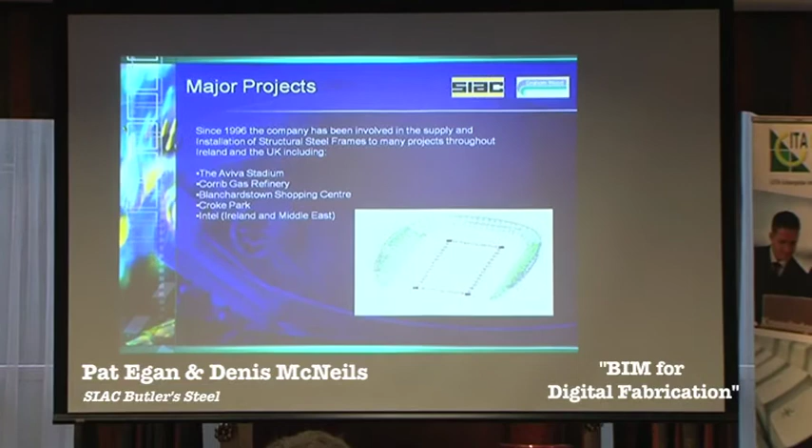So since 1996, the company has been involved in the supply and installation of structural steel frames throughout Ireland and the UK, including, as I said, the Aviva Stadium. We're working on the Corrib Gas Refinery, Blanchardstown Shopping Centre, Croke Park, Intel both in Ireland and in the Middle East, Pfizer Pharmaceuticals, Wyeth Pharmaceuticals, Microsoft Data Centre in Grange Castle, and various bridge projects, to name a few.

But all these have been done using 3D modelling systems without exception. If we were to make the smallest piece of steel that you might pick up in your hand, we'll input that into our 3D model along with the rest of the job. We don't do anything by hand, everything is linked that way. We have total traceability then.

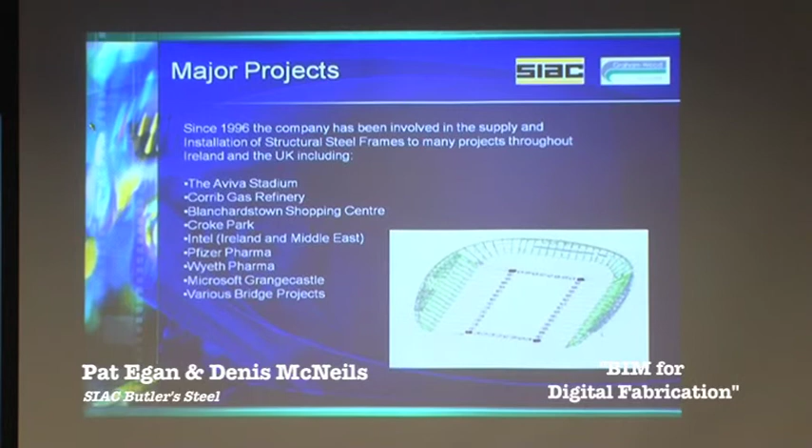Now, Dennis is going to speak about digital fabrication. In the time we have, he can explain a little bit more about the models, etc. Right, Dennis?

Yeah, thanks, Pat. I'll try and keep it relatively simple, but as Pat says, the steel industry as a whole has been effectively a BIM process for over 20 years. And the advantages to us were so apparent that very quickly the whole industry moved down the route of going to 3D software for the modelling and production of all the drawings.

And there are numbers of companies around that do the software, but in Ireland up until recently it was primarily two main companies, StruCAD and Tekla, and now they're one company. So we've got more synergy happening, more production, more effectiveness coming out of the overall design process.

If we take, come on, computer. We always have a computer glitch, don't we? No, I don't know. Yeah.

So, key to the way it works is in-house design and detailing. Because we have our 3D model, we then have full information flow feeding into production facilities and the estimating and, more importantly actually, site. Because since we create the 3D model, and it's very heavy-end software, large computers required, they all have viewers, and those viewers we can send to site.

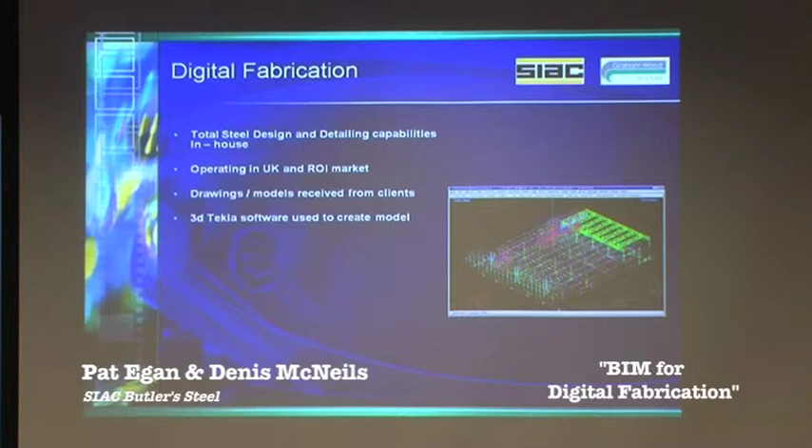So anybody, say an erector on site or the project foreman, if he isn't certain how something goes together, he can go onto the 3D model, rotate it in 3D space, find out how it goes, and check either a mark number or plate size or whatever, and feed back into there. But the key thing is everything we do, as I say, is 3D. The challenge moving forward is for us to get 3D information.

What's happening at the moment is an awful lot of engineering practices and architectural practices are now moving to the 3D world. And they're producing Revit models, or Navis models, or models in 3D. But what they then do is they convert them into 2D drawings, send them to us, where we convert them to a 3D model, and then we extract 2D drawings to send back to them to check. And each of those stages is a potential for error to creep in, or misinterpretation, or whatever.

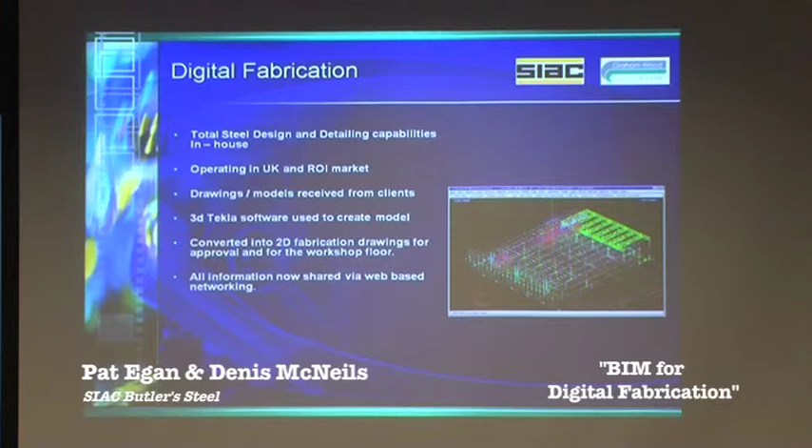And there are now IFC classes which allow a Revit model to export out a file which we can import. And if we get that, it'll get rid of some of the errors that can creep in. But there is an education process that's required, and it is happening. We just hope it'll happen quicker. We've been doing it for 20 years. Hopefully this will move in the next 3 to 5 years.

It'll be everywhere. In the UK, there's a very strong government push towards BIM, and they have a BIM strategy for 2016. From the steel industry, we're happy out, because we're BIM. We're level 2 BIM, so we don't have to worry about that. For the rest of the industry, there is a lot of fear about BIM, but there shouldn't be. It's not overly complicated. We're actually all working toward the BIM environment, but there's an education process, and I do feel it'll all fall into place.

So, our 3D BIM model feeds back into a main database, which in our case is a Strumis database, or it could be a FabTrol database. And that information then gives every plate size, every weld size, how much area of paint there is, what the weight of a piece is, so that from a site point of view they can say, well, that truss is going to weigh 45 tons, so I know what size crane I need. Very difficult to do without a proper 3D model.

And all of this feeds into our production facility. So when we produce the model, press a button, it runs off NC files, which are then fed into the equipment on the main line, which cut and mark every plate, which are all uniquely identified. And it produces fabrication drawings, which the fabricators will then use to pull everything together. And it produces dispatch lists, so that you know that you've got 22 tons on the trailer, and you know what pieces are on the trailer. So hopefully everything gets to site in one go.

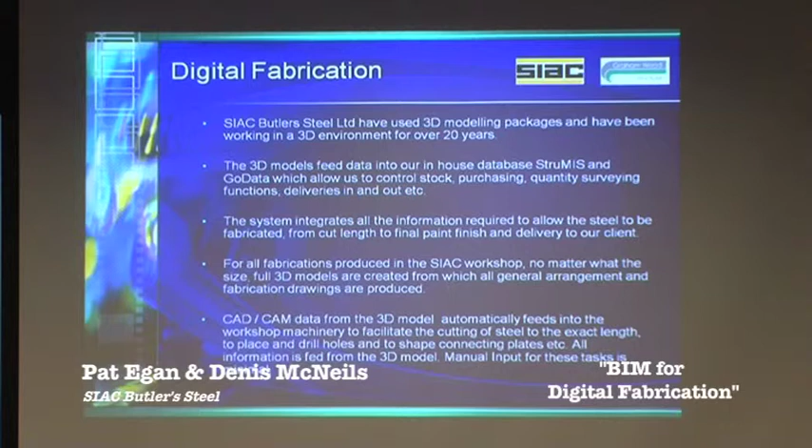And finally, the CAM data. One of the things that is happening is that now the CAM data is going to the Strumis or FabTrol product, and it's feeding directly to the production lines. So you can actually say, I've got 45 of these end plates to make, but I only need 3 in this load of steel. And it'll send those 3 plates to the production line. It'll make 3 plates, and it'll actually tell the computer back saying, yes, I've now made 3 plates, and they've taken us 10 minutes a plate. That's the next stage as they're moving along.

And we have every single bolt, weld, fillet, everything you can think of is in the model. So when you actually think of it, we're building a 3D real model. And it's not like you're just saying, well, it's close enough. Everything is to the millimeter, because everything that goes into the model comes out and is made and is erected. We get it wrong in the model, it doesn't fit.

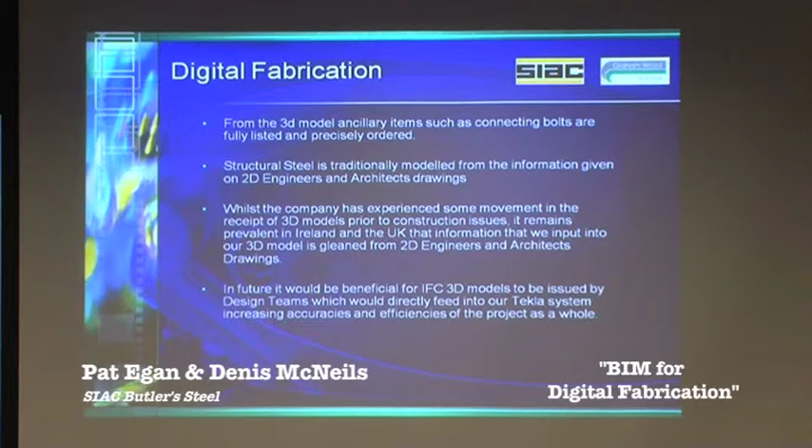So, the IFC is moving forward. There are technological steps to be sorted out, shall we say, but it's 95% there. But it does mean that there's still a verification process. So even if I do get an IFC model in from an architect or an engineer, I'll still have to interrogate it against 2D drawings, because for various reasons, sometimes a member can be flipped through 180 degrees. So instead of the top flange being a top flange, it's a bottom flange, and it's now sticking through the floor. But if you have drawings, you can see these things very quickly.

But if we then take a step back and we produce our 3D Xsteel or StruCAD model, we can export back out an IFC model. Now, our IFC model is a very tight subset of what a Revit model might be dealing with, because we're only dealing with section sizes and bolts and welds. We're not dealing with concrete or timber or insulation or whatever else that the main design team are dealing with.

So the export is very rigidly defined and very clear, and that can be exported as an IFC model, which can then be imported directly into, say, Revit or Navisworks or various other programs which allow for clash detection to be worked out. So the principle of that is we should actually be able to say, well, you've put the beam there, but we've got an MEP, a duct coming through, and your beam is clashing by 25 mil.

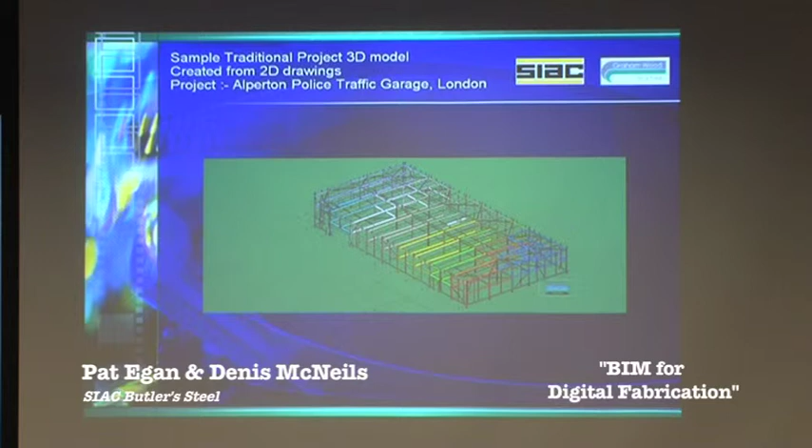And you find that out before it's made and erected, and somebody comes along and says, sorry lads, that duct has to go through there, move that beam 100 mil. It's very cheap and effective to do it in the model. The minute you do it on site, it's disruption and problematic. And sometimes it's very, very difficult to actually make the change geometrically.

So I've got two models that I have with me. This one here is a warehouse garage that we did recently in the UK for the traffic police. Fortunately, it's in Wembley and we're not near it. But this is a very simple braced box building with long span beams.

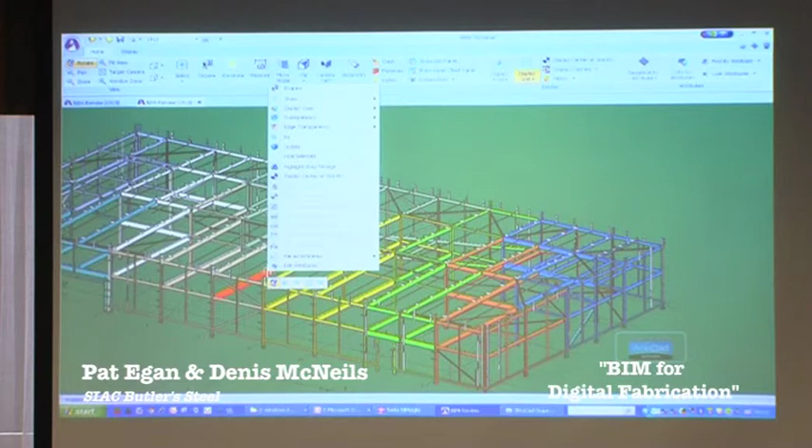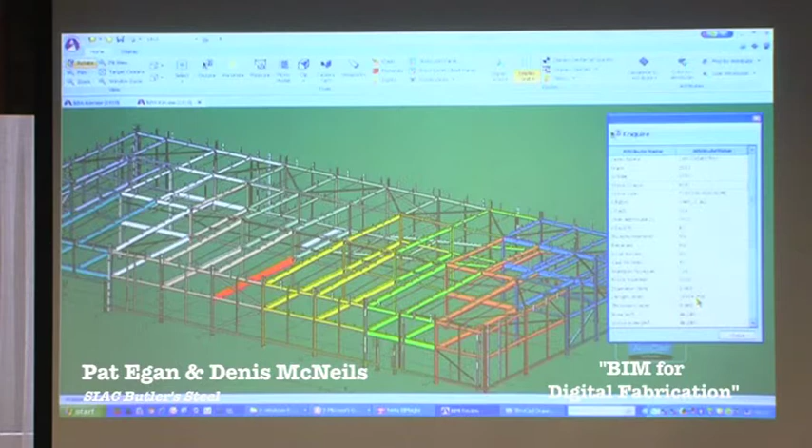But I can go into the model and I can interrogate it and say, what is that piece? And down along the side it'll say it's on the first floor steel. This is the unique mark number, it's 2507. What steel grade it's made from, what size it is. If I come down here, I have the length, it's 16,509.75 mil long. And that will actually feed into the NC for cutting.

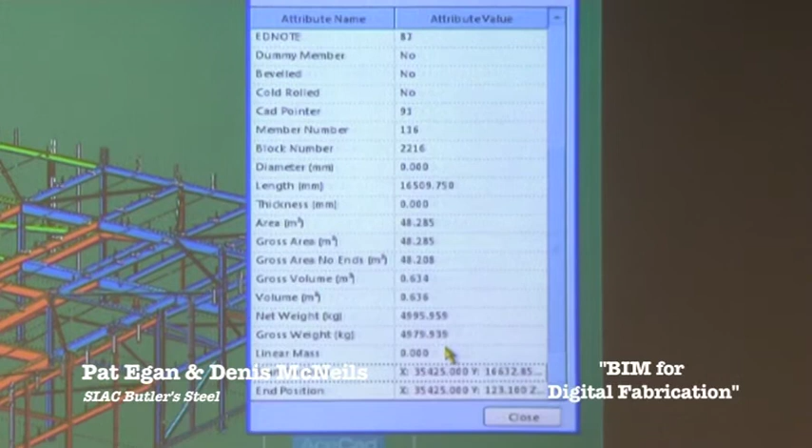And it gives me various other elements such as the gross area, which is how much paint do I need, so I can order in the right amount of paint. What the mass is, so the gross weight of that piece is 5 tons. That means on site they know the size of the crane. And that's simple for a straight beam, but if you've got a truss or a complex piece of geometry, it's actually adding up every single plate, weld, beam.

So sometimes you'd be on a lift and you might be saying, well, the crane is good for 14 tons. Are you lifting 13.5 tons or 14.5 tons? And if it's 14.5 tons, you have to bring in a different crane. And that happens a lot.

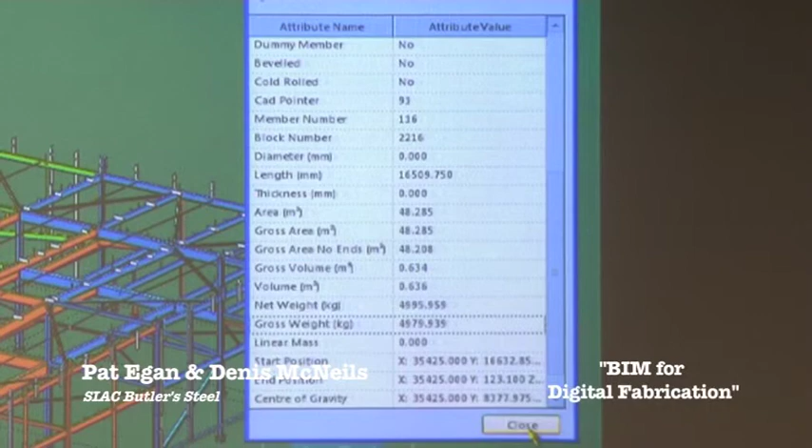So from this, as you can see, you can interrogate the model, you can zoom in, you can isolate, so you're only seeing the piece that you're interested in. And the attributes are configurable. So if we want to add in an attribute to say the weld cert for the testing of this piece, we can apply it to the piece.

If we want to say the material, so you can get traceability back to where the original piece of material came from, we can add it in. And all of this information can be handed back to the client at the end of the day. And if in 10, 15 or 100 years' time somebody says, can I change that piece, or what was it made from, or there's a problem, the information is now available in a database form and is interrogatable, and people can make use of it.

Another one that I have, which is just purely to show the difference or similarities between the two different pieces of software. This one is Tekla BIMsight, which again is very similar in principle to the StruCad software, the BIM review software. I keep on changing the name, I call it StruWalk. But it does the exact same process.

Down the left-hand side, we can add models. So I can add in a DWG, I can add in another IFC model, and you can actually overlay them and see if there are clashes, clash detection, etc. Similarly, if I zoom in, this is a 1,000-ton job that we started 3 weeks ago. And this is what we've got modeled so far.

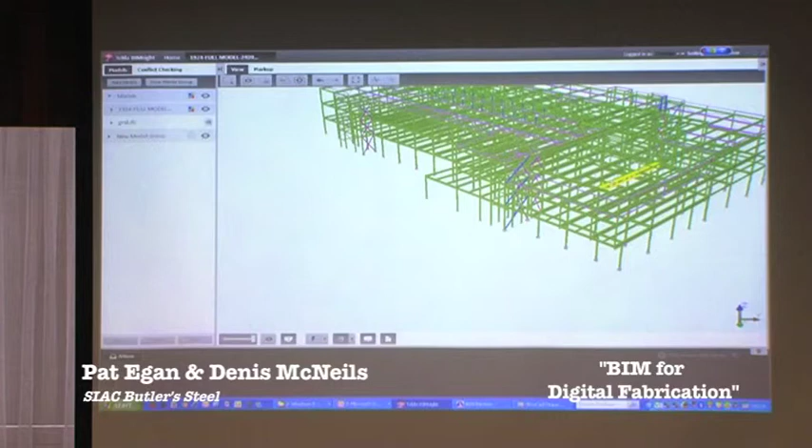But if I zoom in, just to give you an idea, you'll see every single bolt is on the piece, on the drawing. And if I right click on my beam, in a similar way I have all the information about that piece. And there's a lot of information.

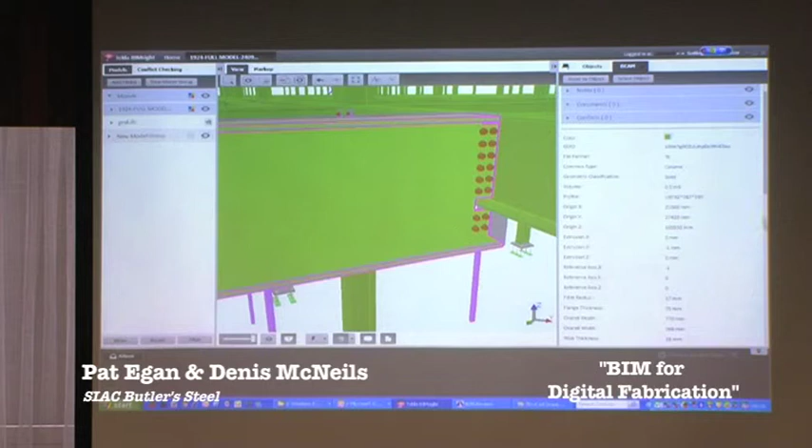So with this sort of technology, it gives us a lot of opportunities to improve coordination and collaboration on jobs. And to be honest, I think if anything, this job has proven the benefits of going down a 3D model sharing approach, because we're now going to be sending back an IFC model so that they can do a clash check. It will also feed into, say, the cladding people, the secondary steelwork for handrails, balustrades, stairs, and hopefully the MEP people, so that we know whether or not we have sufficient space for electrical, mechanical and process.

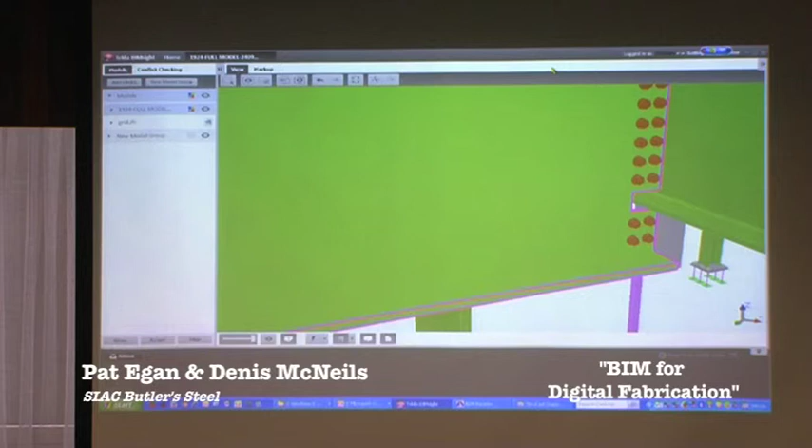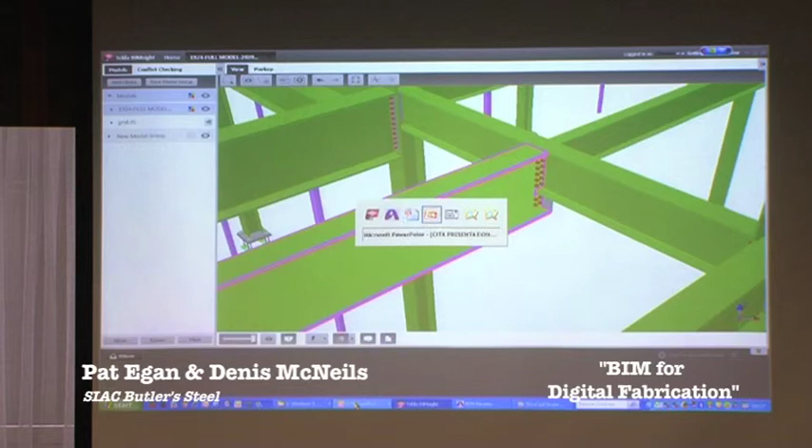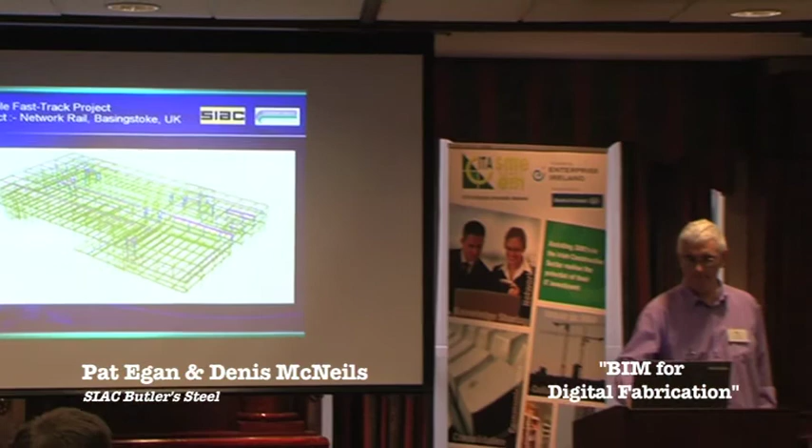So I suppose that's just a quick summary, and I emphasize quick, as to how we use BIM. Just to finish off what Dennis was saying there, there's benefits to us, but we couldn't work without it. There's benefits for cost, benefits for schedule, and benefits for quality, and we wouldn't be able to work the way we do without it. So there's no reason why it can't be applied across the board.